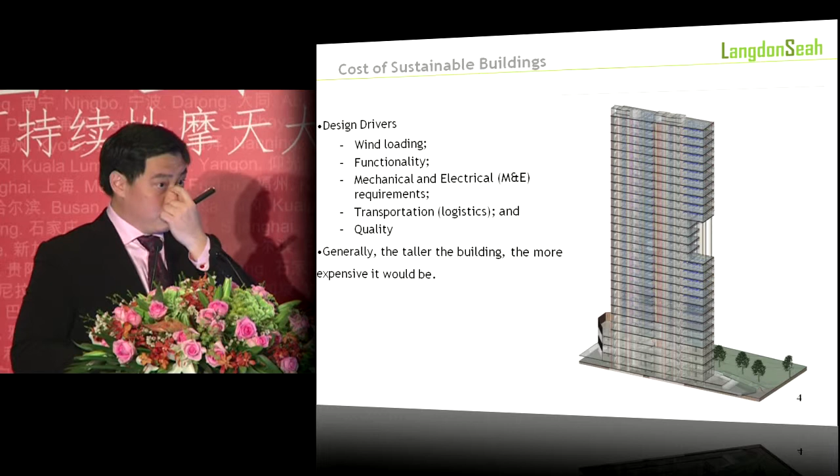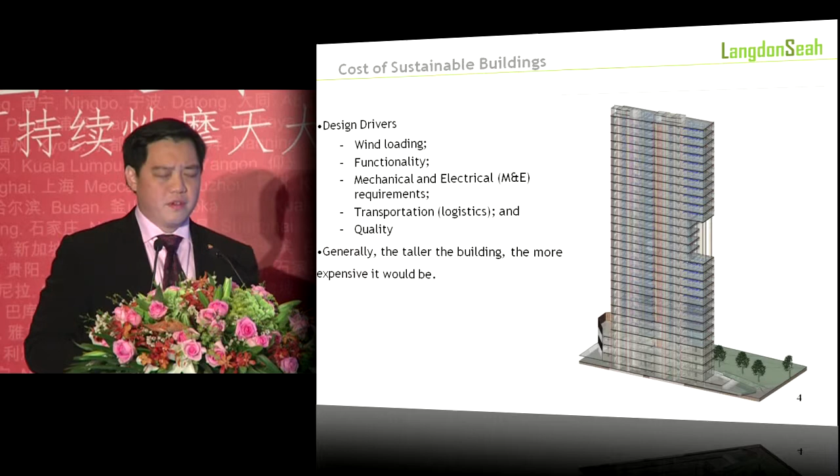You need money to build the columns, the courtyard, and the softscape. All these add up to cost, but they add value. For example, sky courts and sky gardens promote social interaction and social connectivity. On Friday you will hear a talk by two Singapore architects on the Duxton, where they have sky courts and sky terraces that link four or five different HDB blocks together. So that has a use.

So it's not always the case that cost cutting means the design comes out bad. One of the key cost drivers is the facade of the building, which can be 15 to 20% of the cost. I have seen systems, a triple skin wall, where it's about 25%. But there was a reason for that too, because they wanted an iconic design as well as photovoltaic cells plastered on the facade. So in tall buildings, facade cost is something we need to look at.

But how do we look at it as quantity surveyors? I sit very closely with the architect and carry out cost-benefit analysis, for example, on the shape of different buildings, even at massing stage. I come up with a table, a cost model, projecting the shape of the building to find out what will be the optimum and best design for the facade with sustainability in mind, for example sun shading devices, and come up with the optimum shape.

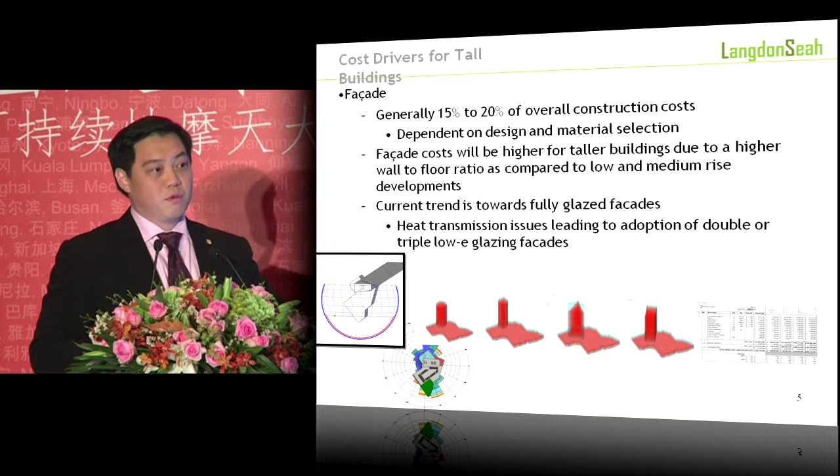There's this thing that we look at called the wall-to-floor ratio. I'll give you an example. A 20 meter square can be achieved with a 5 meter by 4 meter, but that means your perimeter is 18 meters. 20 meters square can also be achieved by a 10 meter by 2 meter, but means your perimeter is 24 meters. The 10 by 2 meter building will cost slightly higher, about 6% higher, because of the shape. So these are some of the considerations, even as quantity surveyors, I need to take into account just by the shape of the building or even by the design.

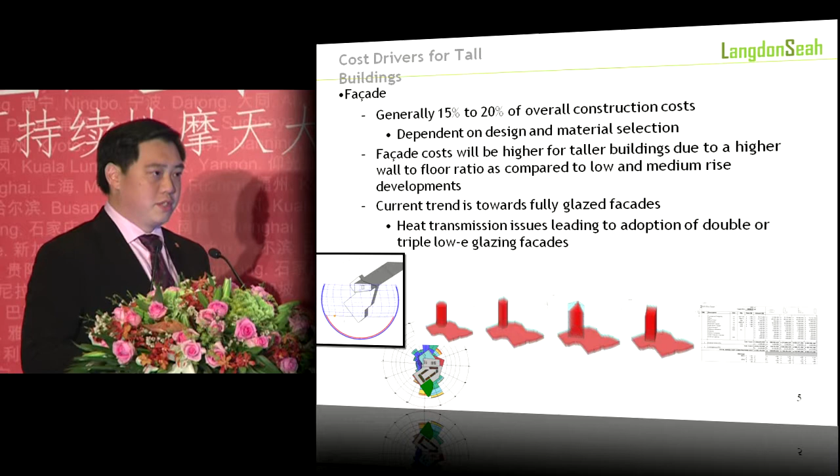BIM has come into play, as what I think some of the speakers actually spoke about. So what we usually do is also sit together with the design consultants to work up the BIM model, and very early in the stage, we need to talk to them. What type of material are they going to be using? What type of design are they going to be using?

This was a study that we did with HOK, and very early in the stage, during the massing plans, we were already looking at the twisting of the towers. This is just one case study whereby if the areas are all the same, but the external wall of the building is different, you'll find that option A, in terms of the wall-to-floor ratio, in terms of construction costs, should come in lower than that of B and C. To me, I think all the buildings look the same, but to an architect, probably there will be a difference. But in this case, A will come in much more cost-effective.

In terms of facade as well, on sustainability, we sit down with the ESD consultants, the environmentalists, to study - just one example would be the sun shading devices. This is a situation whereby we would like to find out what is the optimum sun shading device that you need for a building. Some designs come at 1.5 meters, some have the sun shading devices offset by about 1 meter from the facade. In Singapore, we have the sun at 12 o'clock high. So if you use software like Ecotect, you will find that the optimum size of the sun shading devices will be about 800mm. So 1.2, 1.5 can actually, in this case, be considered a functional overkill.

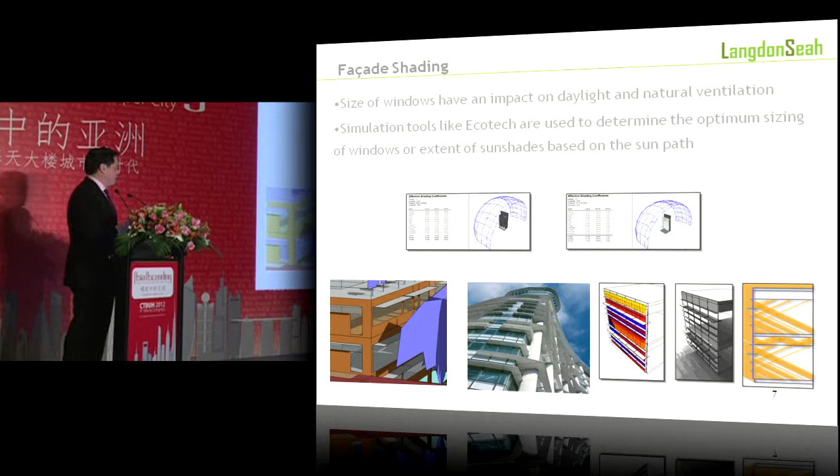I've also carried out studies and found out that if the sun shading devices are pegged exactly where the skin of the facade is, versus if it's offset by 1 meter - if it's offset by 1 meter, it's only 30% effective, but if it's abutting the facade, it's 80 to 85% effective. So that goes to show that if you have facades jutting out, or there's a second skin jutting out from the main facade, that may not be that effective as a sun shading device. Architecturally, you may look all right, but in terms of its functional use, it's questionable.

I mentioned just now about sky gardens and sky terraces. These are non-GFA areas, but they can be quite costly, and this is some of the designs we have back home, whereby it's almost like a vertical green. In fact, I was sharing some design by Toyo Ito on Capita Green in Singapore. It's the Old Market Street project, whereby 60 to 70% of the facade is going to be green. So it's going to look as though it's sucking the entire greenery from ground all the way to the facade, all the way to the roof.

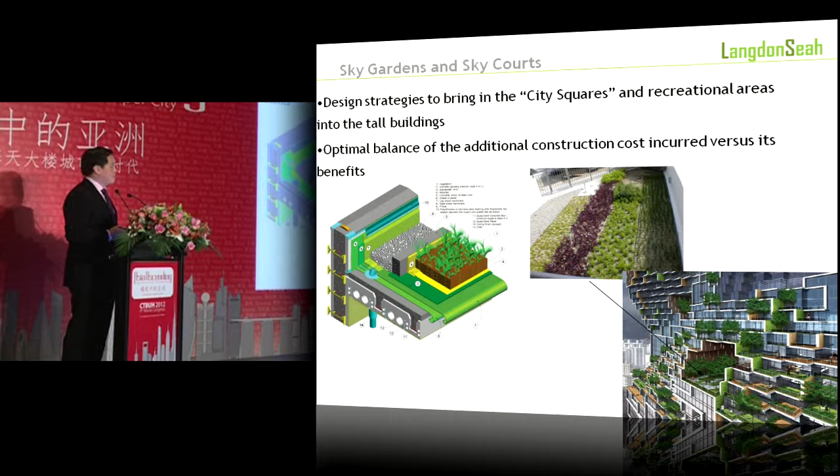So in terms of having these areas, to me it's important because it promotes social interaction. It can be used as a sun shading device as well. But building these areas, you can do it very cost effectively. For example, this can have a consolidated cost of about $25 per meter square versus a built-up roof that can be about $300 to $500 per meter square. So we need to work very closely with landscape architects, in the beginning, to find out how we can green such spaces cost effectively. One thing to consider is also maintenance, because if you have too much greenery, maintenance can be a nightmare.

So the benefits of green building, from where I stand - I was just interviewed this morning by Jeff, and I shared with him that where we observed, there's higher occupancy, higher productivity, and higher yield. LEED has done a study, and they have shown that there's even better yield rate in terms of green buildings in America.

But we have to recognize that there is a premium to pay for really green buildings, for example platinum buildings. Sometimes I'm given a challenge by the client to say, this is your budget, I want a platinum building, go with it. So it's going to be quite challenging, because if you want a platinum building in Singapore, we need to achieve a minimum of 30% energy saving from base. There's quite a lot of work to do. We have to work with the facade, the ACMV people, the electrical, just to come together to get the platinum building built.

One thing we also look at is life cycle costing, whereby we try to prove by calculation to the developer that you may need to spend 3 to 5% more on a certain product, but you have a 2.5 year payback, and the rest will be savings over the life cycle of the product. For example, if you use structural steel, you'll be able to recycle it for another building, and it's 1/3 the carbon and half the cost.

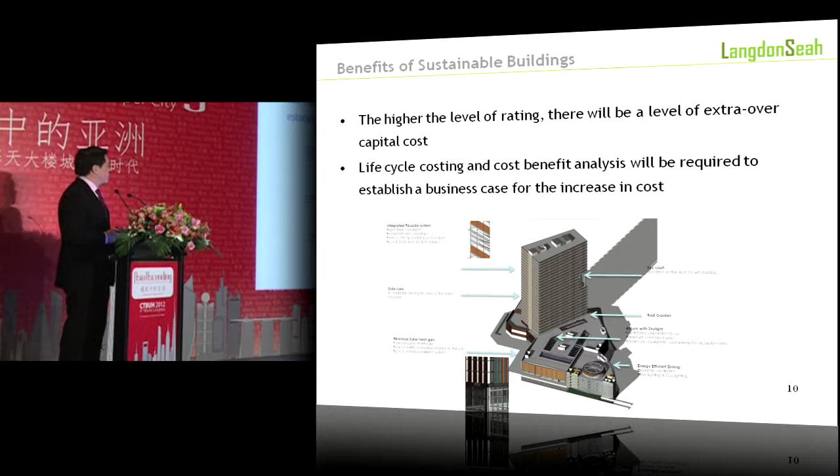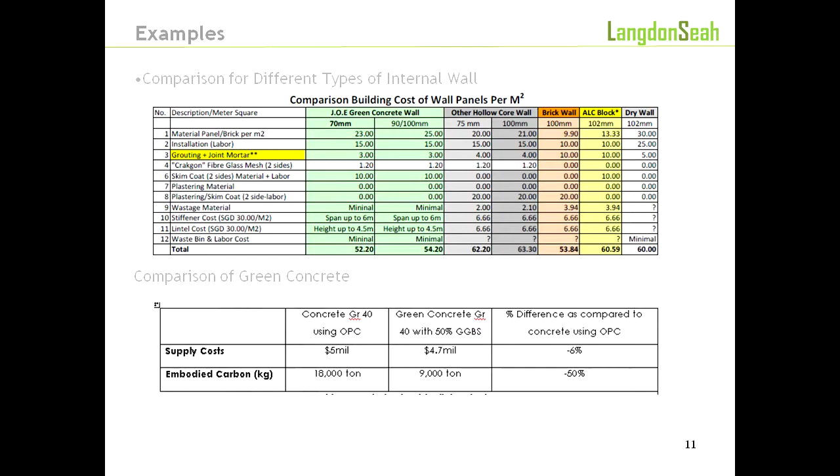In Singapore, we have legislation called buildability scoring. A green wall will get you 2 points, but others will not, because it's not buildable - it takes 5 to 6 people to do the same work that 2 people can do with this wall. Such studies carried out by the quantity surveyor in conjunction with design consultants are very important, because they validate material use and validate design.

A new thing happening in Singapore now is productivity and space planning. Purpose-built, pre-engineered buildings are built for developers, whereby studies have been carried out comparing a central core versus a side core, looking at depth of space, adjacencies, and even quality of space.

This can actually impact sustainability as well, because if you have a side core, the envelope thermal transmission value will be lower, versus if it's cladded on 4 sides with glass. But in terms of usability, if you have a front of house area greatly used in one part and a back of house in another, this would suit better.

But if you want multi-tenanted use, then a central core is better. So there are pros and cons that we need to weigh and sit down with design consultants to come out with the best design for tall buildings.

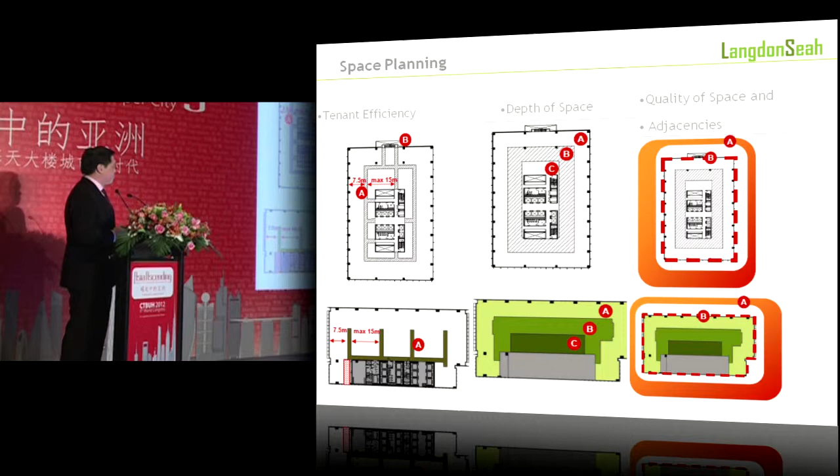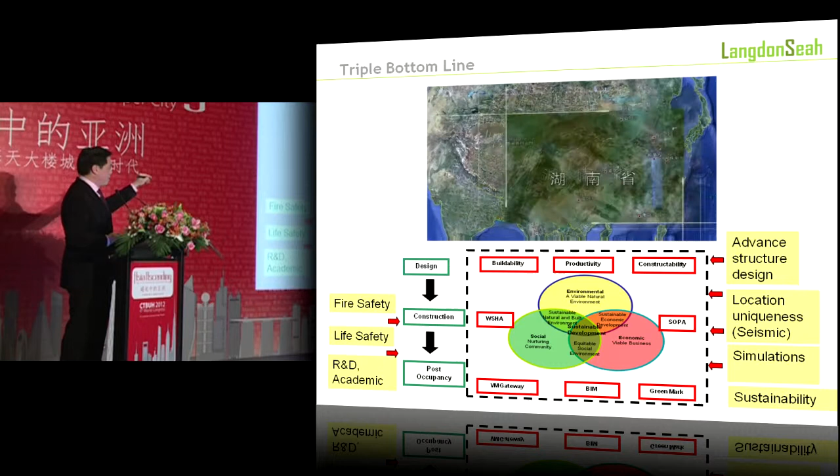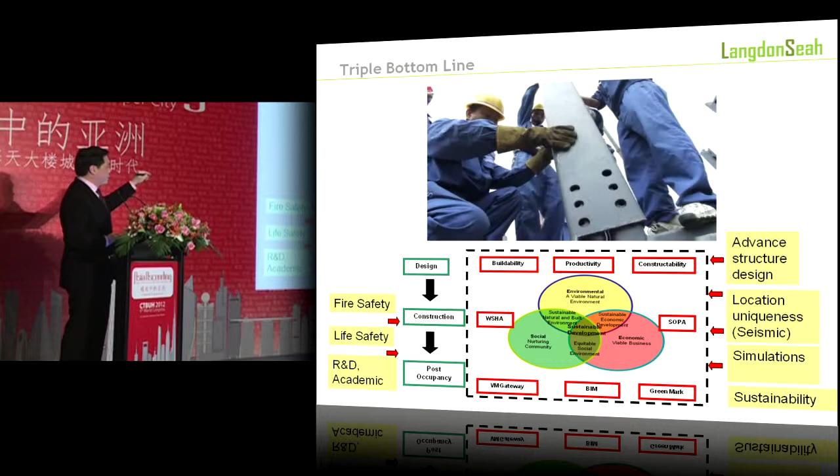While the movie is playing, this is a model I created in Singapore. It's a triple bottom line, whereby environment, economics, and social come together on sustainability. Design consultants, for whatever building, have to look at buildability, productivity, constructability, even safety under the Workplace Safety Health Act, supported by value, BIM, and even Green Mark.

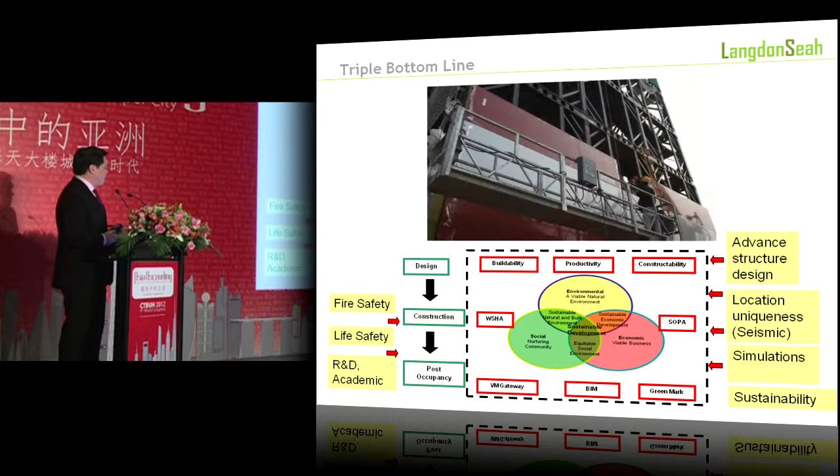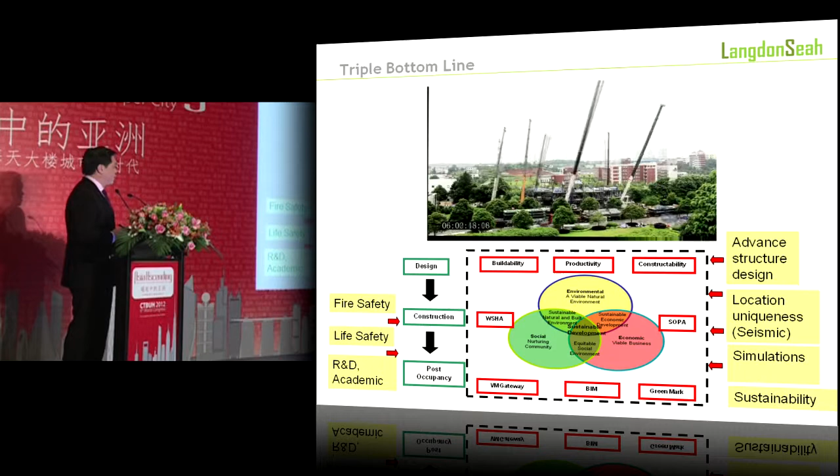Now looking at the issues surrounding tall buildings like fire, life safety, R&D, advanced structure and design, location, and simulations - these can all come together for tall buildings to support the triple bottom line. This is just one example of a building that has been built.

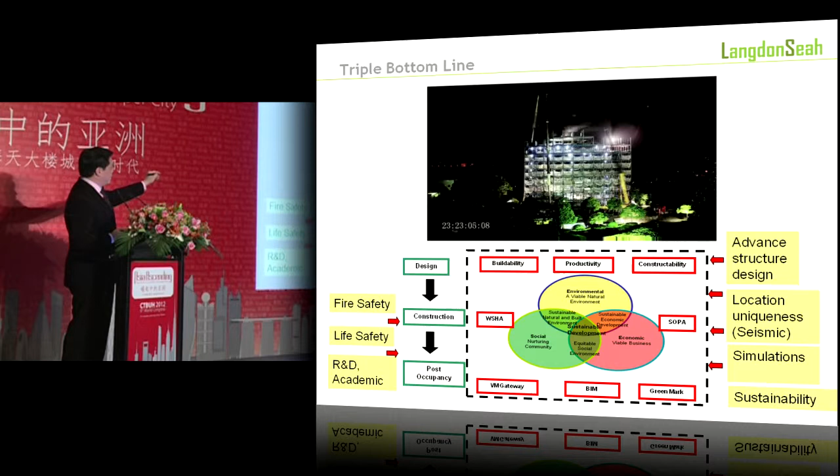This building is in Changsha, Hunan, and it was built in 7 days. If you can see the timer here, this shows the number of hours, and you can see it was actually closed in 7 days, not including foundations.

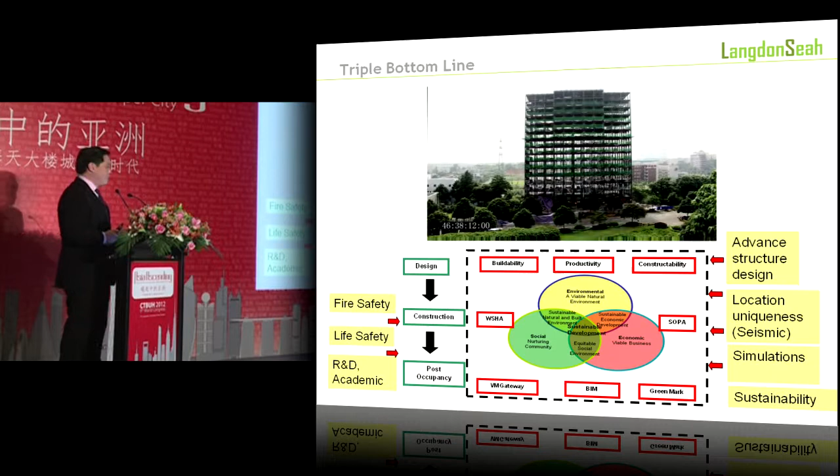One of the things we are also looking at in Singapore is carbon. We have clients looking at not only operational carbon as a carbon plan, but also embodied carbon. So they will be looking at us to come up with a cost plan, but in relation to the respective carbon that comes together with that material.

We have carried out a carbon plan on some buildings and found that in Singapore, our carbon is about 850 kg per meter square, whereas in the UK, I understand it's about 400 to 500. In Singapore, for a commercial tall building, you're looking at carbon of about 1 ton.

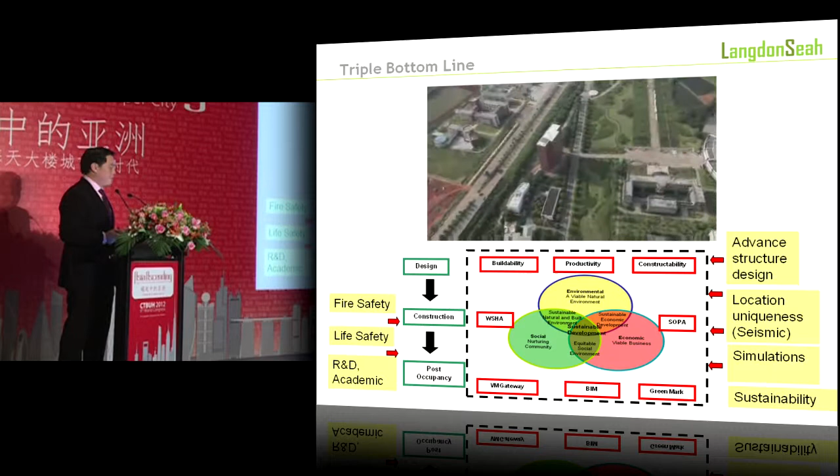So there you go - this building was done in less than a week, and it's a functioning hotel.

I think productivity management is something we have to look at now as well, and it has to be juxtaposed with cost, design, sustainability, and of course the functional use of the building. I believe there is room for studies in terms of how you can build faster, better, safer, and with sustainability in mind.

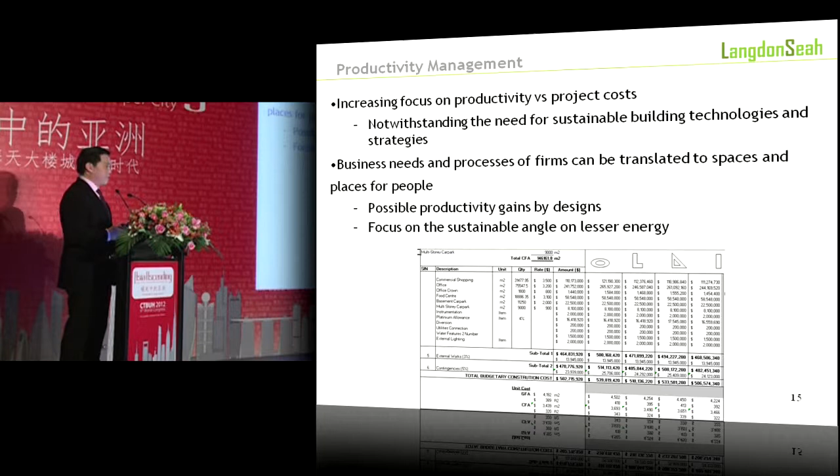So in conclusion, tall buildings are able to ensure maximum optimization of land, especially for land-scarce Singapore, but there are huge capital investments involved.

And of course, if cost drivers and design drivers are observed together, I believe you get a building that's not only cost-effective, but of better value. Thank you very much.